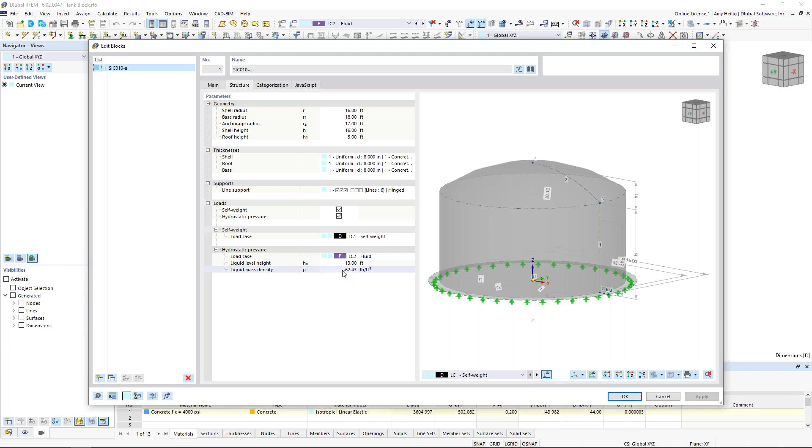We can even consider the hydrostatic pressure with an additional load case here. For example, you could input the mass density of the liquid, the height of the liquid inside the tank, and behind the scenes, we're running a JavaScript in order to update this block. So once you hit OK, it's inserted into RFEM directly.

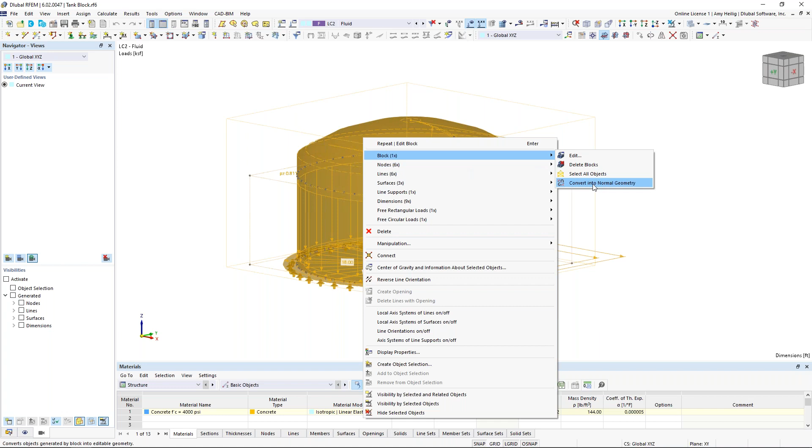If we wanted to make any changes, we could always right-click here to edit the block, or if we wanted to go ahead and convert it into normal geometry, we could do so to make additional changes to standard surfaces, nodes, and lines. If we turn this into wireframe view, it might be nice to see that additional fluid load inside the tank structure that was automatically added based on the density and height. So this is certainly something to take advantage of, if your basic geometry fits into one of these block options. Now for today, I will be showing the tank modeling from scratch.

We'll go ahead and open up a new model here. When we first launch the program, we would want to give it a model name. The type of model is set to 3D. Under the add-ons, these are the optional add-ons because RFEM 6 is responsible for the full analysis. But when it comes to design or some advanced analysis features, that's where we would want to activate the add-on. So in particular, today we're going to take advantage of the concrete design.

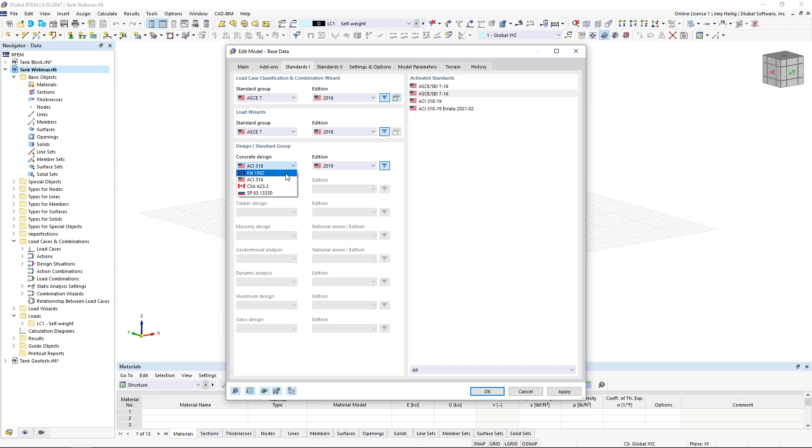So you'll notice on this third tab here, we'll now carry out the concrete design of our surfaces today according to the ACI 318 2019. But we also have the additional standards such as the CSA, the Eurocode, and any other international standards available under that concrete design add-on. We can generate our load combinations automatically according to the ASCE 7 or any other international code that you see here. We have added the 2016 version, so we will go ahead and generate our load combinations according to this standard.

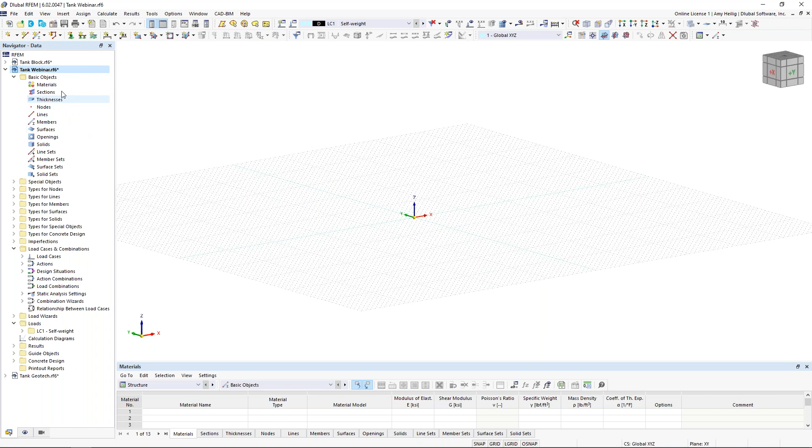So once we have input all of this information into our base data, we're brought here into our main program, RFEM. We'll begin today by drawing a new line element. I can do so within my toolbar. The line type is going to be of the type circle.

With this, I can snap to the origin point here, and then my second click can either be directly on my drawing grid to define my radius, or I can type in the radius into this dialog box that you see here and hit enter on my keyboard. So once we are done drawing this circular line element, I'm going to right click to divide the line by one intermediate node. I click OK, and so now you can see here I have two separate semicircles.

I'll select both of these line elements, and I'm going to right click here. And we have the option under lines to extrude this line into a 2D surface. So this is just a time-saving step rather than having to manually create this surface. We can actually extrude it directly from the line element.

We do want to generate a new thickness for our surface walls. So we'll define here our first thickness type of 10 inches, and we do need to also define a new material. So we access our material library, and over on the left, we'll use our filters to the United States, concrete, and we can select the ACI 318-2019. I want to utilize 5,000 PSI concrete directly from the library.

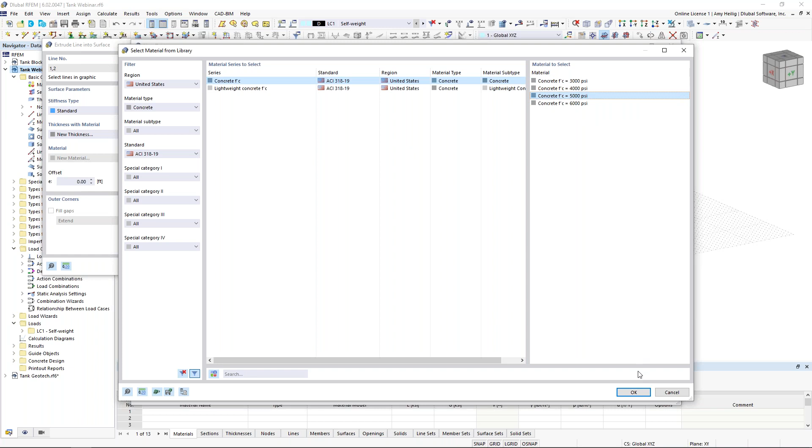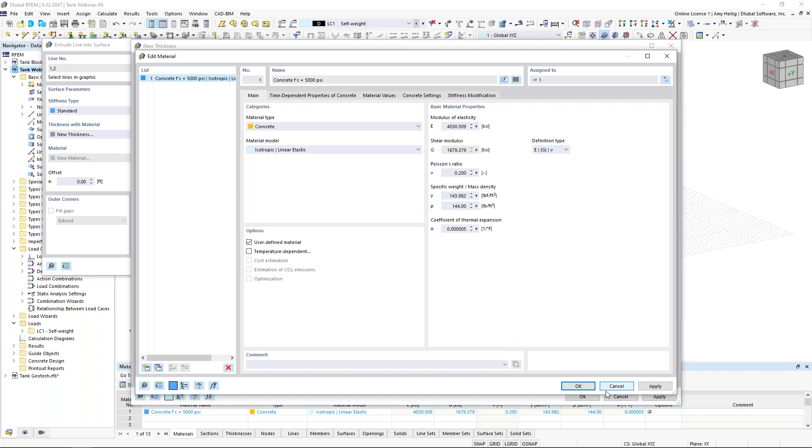Now, if we are utilizing a material for our project that isn't directly available in the library, we could certainly set one of these available materials, come back in to edit it. Then we can click on user-defined material here. And you'll notice that the material values can be adjusted, including the concrete compressive strength, modulus of elasticity, or anything else that you see here. You also can give it a custom name. For today, we'll go ahead and utilize the 5,000 PSI concrete, 10 inches thick as mentioned, and I click OK.

We now need to define the height of our tank wall. So I can directly input 17 feet in the positive Z direction. I click apply, and you can see here that our surfaces are automatically generated. If I take a look at both of these surfaces by highlighting and double clicking, we can see that information available to us in the Edit Surfaces dialog box, 10 inches thick, 5,000 PSI concrete.

Now the design properties is automatically turned off. When this option is turned off, we are purely going to do an analysis of these surfaces only. So nothing to do with reinforcement or the ACI, but when we turn on this checkbox, we will refer to that concrete design add-on to carry out the design according to the ACI standard. We'll get into this a little bit later on, so we'll leave those design properties off for right now.

We then want to go ahead and draw the surfaces for our roof. So I will define here a new node, and I'll directly type in my node coordinates as 0, 0, 21. I hit apply. I can right click to exit, and we see that node generated at the top of what will be our roof surface.

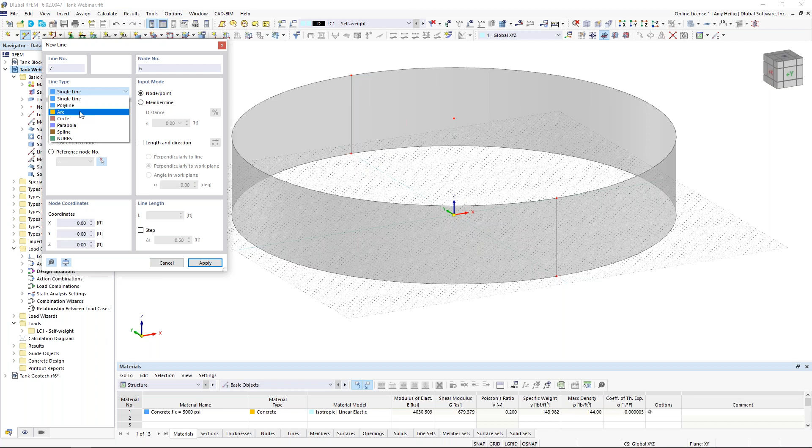I create a new line element. This time the line type is going to be arc, and then I can simply select all 3 points here to generate that line. I do want to break apart this line at this intersecting node so that it's two separate lines, and I can do so with this tool up here to connect the selected lines and then just highlight over this location here. So notice these are now two separate lines. I'm doing this because the program likes this a little bit better when it comes to the FE mesh generation that we'll see in a few minutes.

So now that I have generated these boundary lines, I need to create my surfaces at my roof. Well, we do have the surfaces available here in our dropdown.

The problem with these is that the surface must be in a single plane, and we have essentially a curved surface for our roof. So instead, we want to use the option right next to it, utilizing this dropdown to select a quadrangle. A quadrangle surface, as you can see, can have curvature. It doesn't necessarily have to be in a single plane.

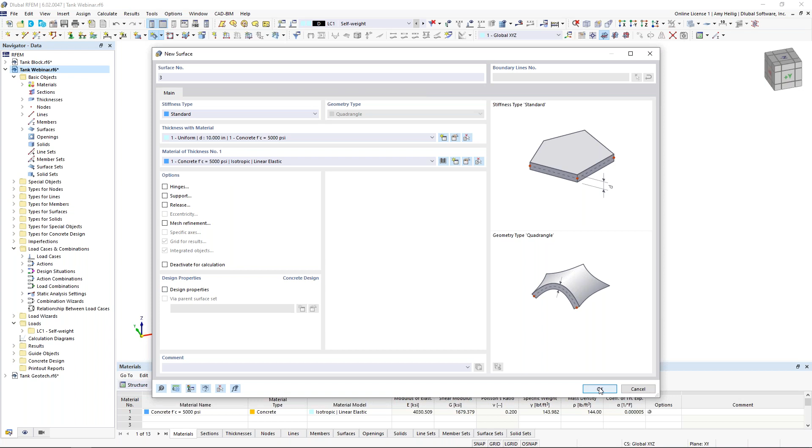We'll utilize the same thickness, the same material already defined for our tank walls, and we can turn off the design properties if we'd like. I click OK, and then I'm just simply going to select the boundary lines here of my surfaces at the roof elevation.

And now we have those surfaces drawn here. The final surface modeling is, of course, for our foundation. So we will actually utilize one of these surfaces here in a single plane, selecting the type circle.

For my foundation, I want to increase the thickness. So instead of utilizing the existing 10 inches thickness, I'm going to create a new definition type here, and we'll set this to 12 inches, utilizing the same 5,000 PSI concrete. I click OK. I'll turn off the design properties again.

I click OK. And for this, I'm going to snap here at the origin of my drawing grid. Then I can either snap directly on my drawing grid, or I can input the radius by typing it on my keyboard. For this, I'll set the radius by snapping to my drawing grid at 48 feet.

Now I'm going to take this one step further to actually add an opening at that surface that I just created. I want to create that opening utilizing the boundary lines at the bottom of my tank wall. So I select a new opening option, and I'll choose the type graphically. This allows me easily just to snap to the lines here of my bottom of my tank wall. That opening is generated. So now what we're left with here is a single surface on the exterior.

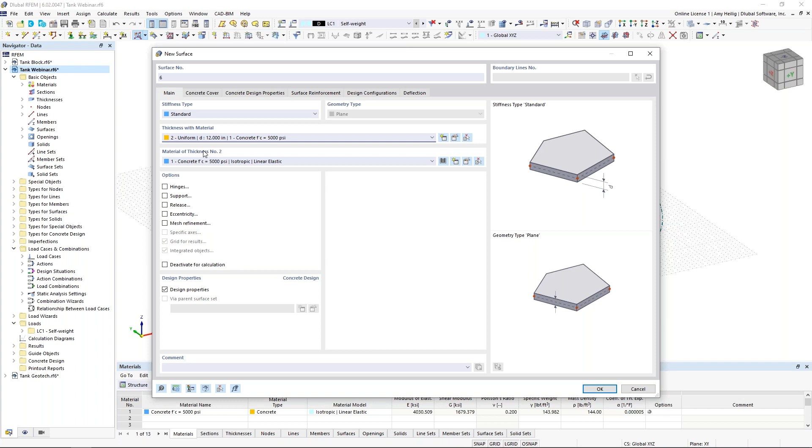Well, I want to fill in the opening now with an additional surface. So I'll go back up here to draw a new surface by selecting the boundary lines. Now I want to utilize the 12-inch thickness, the 5,000 PSI concrete, and I'll click OK. Now I can fill in that opening with an additional surface.

So you might be wondering, why did I create two separate surfaces here, one for the interior of the tank and one for the exterior? When it comes to loading a little bit later on, this will be much easier just to have a single surface on the interior at the base of the structure.

Okay, so now that we are done with our surface modeling, let us talk about support conditions. We can apply here a new surface support, and we do so within our toolbar up at the top, creating a new support definition type. For this one, we want to apply our soil stiffness in the vertical Z direction of our surface.

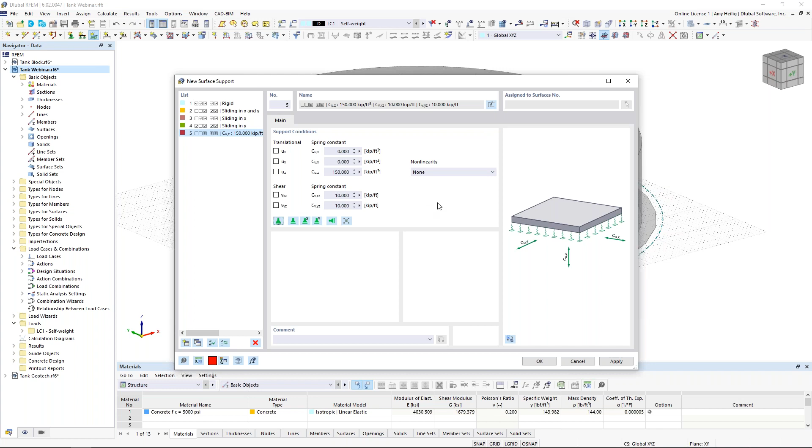So I can directly type in here the information that perhaps I received from the geotech engineer. For today's example, 150 kips per cubic foot. Now the spring constant in the shear directions of my soil, again, probably given to us from our geotech engineer, some smaller values such as 10 kips per foot. Once I have the definition type here of my soil, I'll click OK.

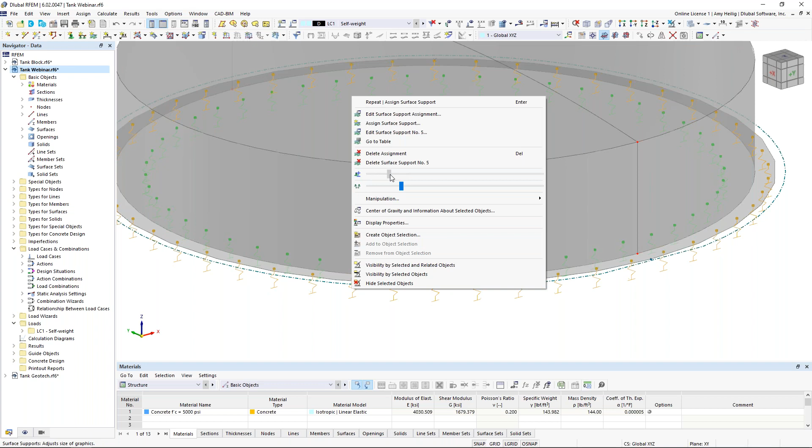I click OK once again, and then I can select these surfaces at my foundation level. I'll right click to exit. Let me turn off my drawing grid. Notice that with these surface supports, we can always right click and use our slider here to increase the size of these in case they're too big or too small. That's a nice feature we've recently added as well.

Now, as far as the translation directions, I want to apply a new line support. With this line support, I'm going to take advantage of this already predefined definition of a hinged application. So essentially, we're just going to restrain translation in the global X, Y, and Z directions. Perhaps we have some type of stem wall at the exterior here that's preventing any translation in the X or Y directions, as well as maybe in the vertical direction.

Now, of course, the support conditions will vary depending on your structure, but that's just a short introduction of how to apply those for our example today. Let us talk about the local axes. This is a very important topic when it comes to surfaces.

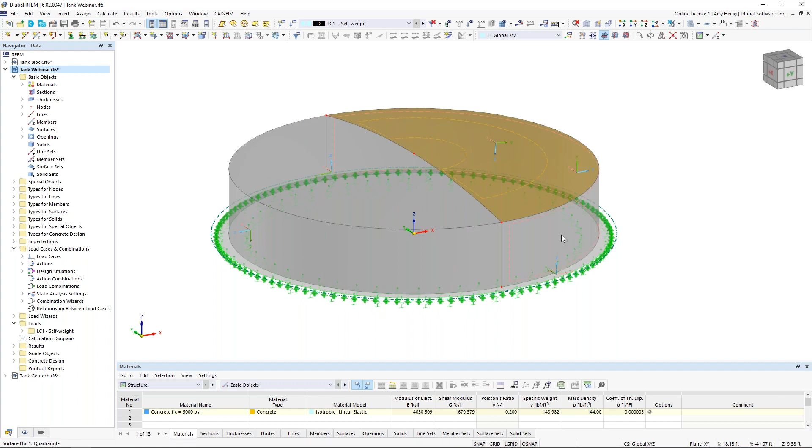So with these surfaces, I can right click here to turn on the local axis system. And maybe I'll turn this to wireframe view so it's a little bit more clear to see. Now notice that for my two roof surfaces, the Z axis is facing up on the left, but it's facing down on the right-hand side.

So why is it important to consider the local axis orientation for adjacent surfaces like this? Well, for several reasons. The first is when we are applying the reinforcement for these surfaces, it does depend on the local X and Y directions. Number two is load application - we'll certainly be applying loads today that are normal to the face of the surface according to the local Z axes, so we want to ensure they're all facing the same orientation. And finally, our results. The results presented to us for these surfaces are also based on the local axes. So if we just have our axes facing every which way with no order to them, the input into the program as well as the result output is not going to be correct. Again, a very important topic.

Now, to address the Z-axis facing down over on the right-hand side, this is a very easy fix where we can just right-click on this right-hand surface and reverse the local axis system. And now you'll notice that both of those are facing upward. The Y-axis and X-axis are also oriented in the correct direction.

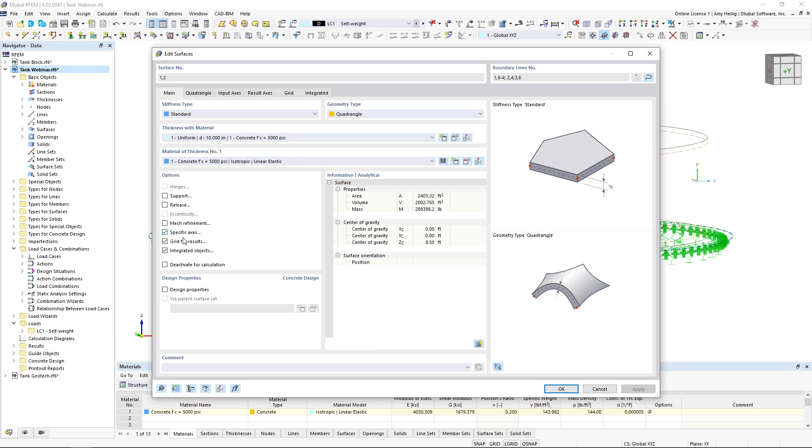If we take a look at our wall elements here, our wall on the left has the Y-axis facing down, but the Y-axis is facing up on the right. Now, to right-click and reverse the orientation won't work in this scenario. So what we need to do is to highlight both of those surfaces for our tank walls, double-click to edit, and activate here what we call the specific axes.

So we now have a new tab called Input Axes. Under this dropdown, we can choose the option Axes Parallel to Lines, where I can tell the program to set the local Y-axes of my surfaces parallel to a line that I select in the model. So we'll choose line number 6, for example. I click OK through these dialog boxes, and now you'll see the Y-axes are oriented in the upward direction for both surfaces. The Z-axes are pointed outwards, and the X-axes are in the horizontal direction. So everything looks good there.

So once we have ensured that we have oriented our local axes, we can go ahead and right-click to turn those off. The next thing to do is to talk about the FE mesh. I always think generating the FE mesh is a good tool to use while we're modeling to ensure that we don't have any modeling errors. So now that we're done with the drawing of the surfaces, the supports, the local axes, under Calculate Mesh Settings, the target FE mesh length is set to 1 foot by default.

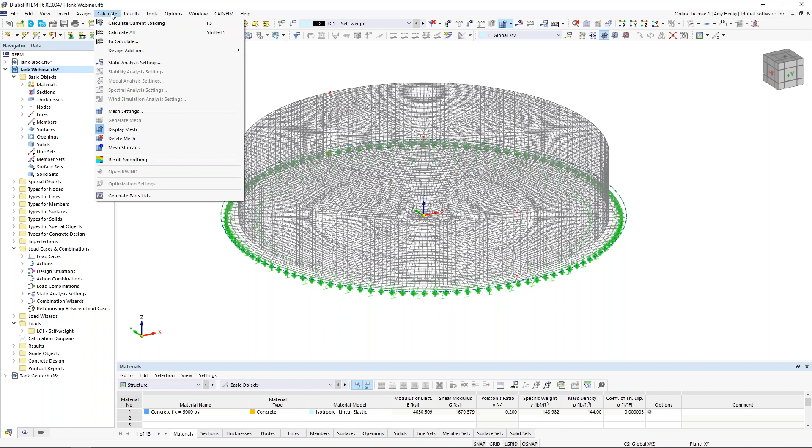So if I hit OK and apply, the program will go ahead and generate the mesh for us, and we can see the mesh looks quite good here for this structure. Now, for my example today, I want just a quicker calculation, so I'm actually going to set this to something a little bit more coarse, but certainly for your projects, 1 foot might be sufficient here.

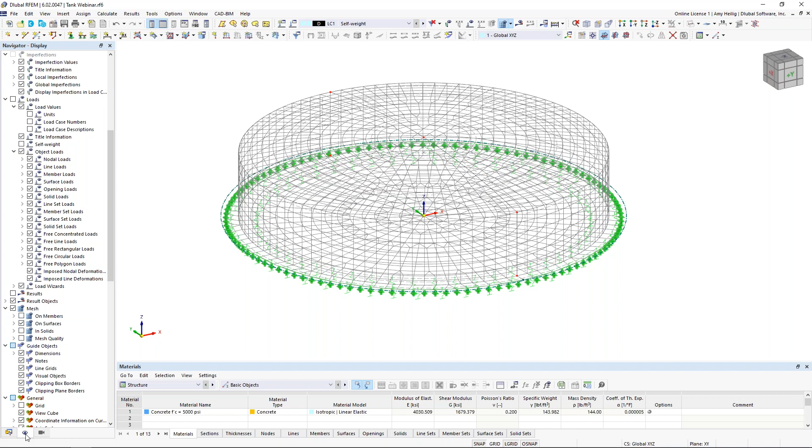For today, we'll go ahead and utilize a 3 foot FE mesh spacing, again just for a quicker calculation. I would probably recommend that even this is a little bit too coarse - we would want to go a little bit smaller. But moving forward with our example today, if we're not interested in viewing this graphically after we've generated the mesh, we can simply visit our navigator over on the left, the display tab, and here we can turn off the FE mesh graphically.

So let us talk about the reinforcement now. Each of these surfaces, if you remember, I'll highlight all of them - we had actually turned off the design properties. When I turn these options back on, notice the additional tabs that we get up at the top. I do want to preface that I already did a webinar related entirely to ACI concrete design for members and surfaces where I go much more into detail than what we have time for today. So certainly refer to that recorded webinar if you are interested to learn more about the concrete design add-on.

So today I'll just be giving you a brief overview.

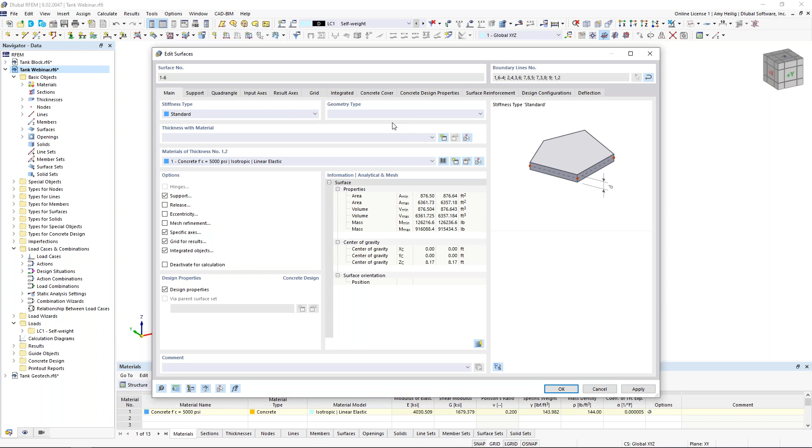So we'll visit the concrete cover here, and we can see the default is set to 1.5 inches at the top and bottom, or we can make modifications here.

The concrete design properties. This is where we tell the program in which orientation we want to set the first reinforcement direction. The default here is set to the local X axes. So again, the reinforcement is dependent on those local axes, hence why we want to ensure that adjacent surfaces are all oriented in the same direction.

We could also modify this to the local Y axes. We could also rotate it so it doesn't necessarily have to follow either of those axes. So quite a few options there.

Under the surface reinforcement, we do need to define a new definition type here. So we create a new surface reinforcement. The program immediately asks what type of material would we like to use for our reinforcement.

So we visit our material library. The program populates over on the left-hand side the United States reinforcing steel for the ACI, where we choose grade 60. I click OK.

Now the reinforcement type dropdown, we do have mesh. So we have some welded wire mesh options directly available. You can choose from our library, or the rebar option, where here we can select, let's say, number 7s at the default here, 6 inches on center spacing.

Now we can see our picture over here on the right update, so that we have our number 7s at 6 inches on center, again in the local X direction.

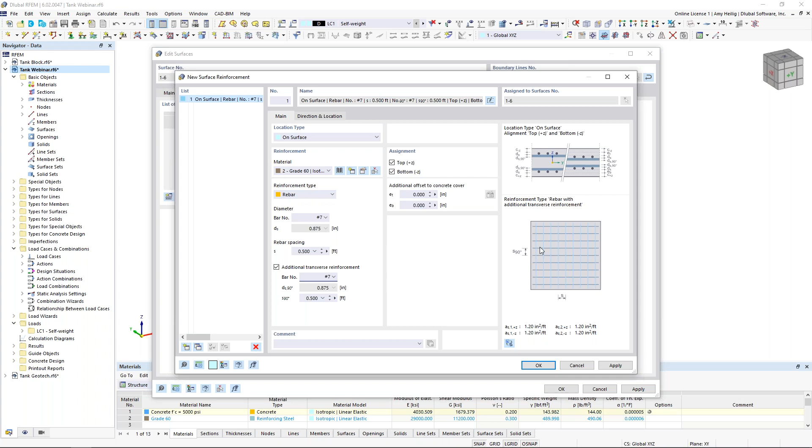If we wanted to apply transverse reinforcement, we can do so within this same dialog box by simply turning on this option here. We'll also choose number 7s, and we'll leave this at 6 inches on center. The picture updates on the right, so now we have that additional reinforcement in the local Y direction of the surface. This is applied at both the top and the bottom.

Now, I recognize for a standard project, we would probably have different reinforcement for the foundation versus the tank walls versus the roof surface. But for today, we're just using those number 7s at 6 inches on center for all surfaces, but you certainly can create additional reinforcement definitions here.

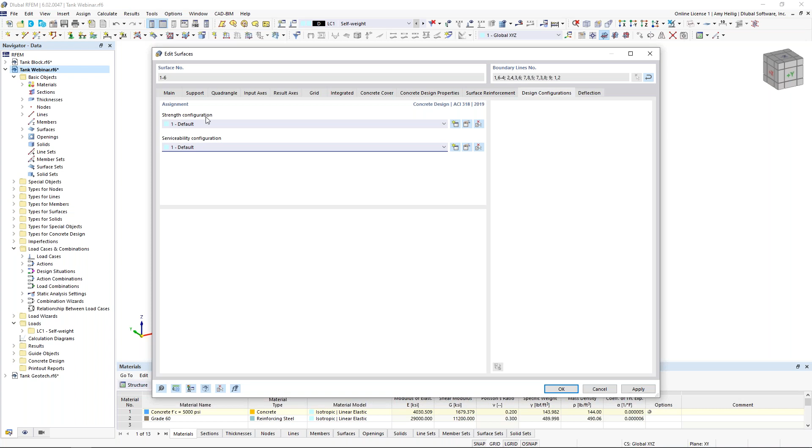Under the design configurations, we have a couple default options here. If we take a look at our strength configuration, this is just the information that is specific to the ACI 318 that goes into the calculation for the strength design.

Now, alternatively, we have the serviceability configuration. So if we take a look at here, what might be interesting for our project today is to talk about the crack analysis. So we certainly can take into consideration the crack width and the reinforcement spacing set forth by the ACI in chapter 24.3.2.

But we also can take a more analytical approach and actually calculate the true crack width with the Gergely-Lutz equation. Once we get this crack width, we can compare it then to the allowable crack width set forth by the ACI PRC 224. Within this drop-down box here, we have the limiting crack widths, and you can see it all depends on what our structure will be used for.

For today, if we want to utilize this tank to be used as a water retaining structure, perhaps we select the first option here. Now notice that my allowable crack width is something very small, at 0.004 inches.

We also have some additional settings here for deflection, including the limiting deflection ratio for surfaces that are supported on both sides or maybe more of a cantilever type surface. If we're not interested in deflection at all, we could certainly turn this off altogether.

So once we have made our serviceability configurations, we can click OK. Keep in mind that you can create different configurations for different surfaces in the model, but currently we're applying these same configurations to surfaces 1 through 6.

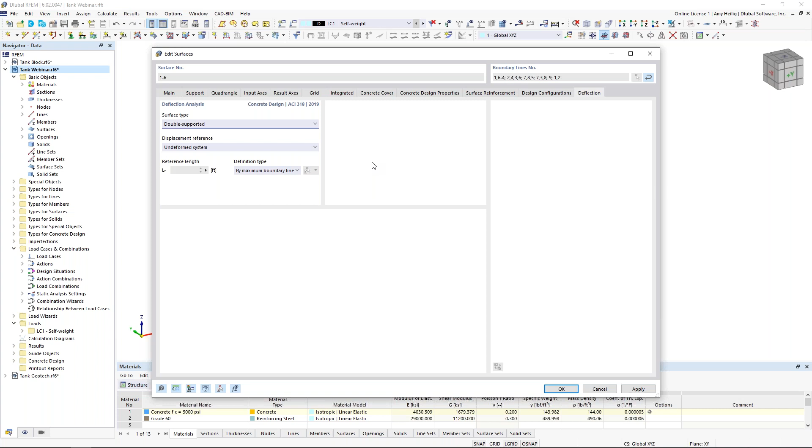Okay, so once these are defined, I click OK, and what you'll notice is that we actually give you a visual representation of those number 7s at 6 inches on center at both the top and the bottom of the surface.

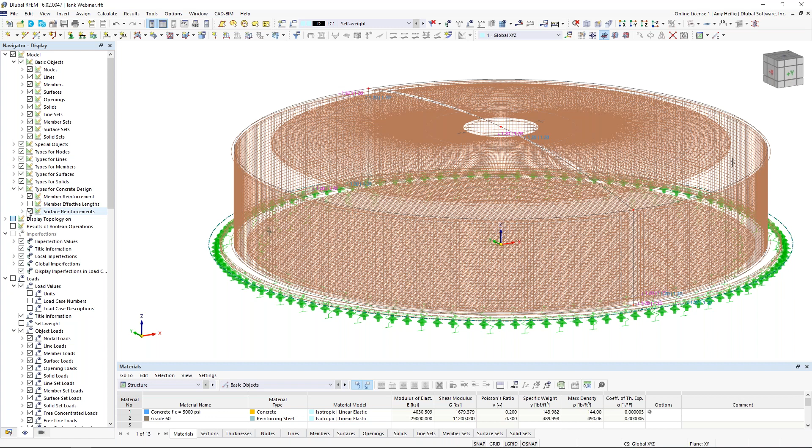So if this is a little bit too overwhelming graphically, we can once again visit our navigator and the display tab down at the bottom. If you scroll all the way up to the top, we have this option here under the model tree for types for concrete design, where we can turn off the display of the surface reinforcement.

So I would now say that the modeling procedure is complete. We would like to now move on to loading. We'll visit our load cases and combinations dialog box by accessing this button here in our toolbar.

The program automatically creates our first load case here, such as self-weight. I'm going to rename this one to dead load. Notice the self-weight is active here. We'll select the action category dead, and this is all based on the ASCE 7.

If we take a look back at our base tab here, remember we told the program to generate our load combinations automatically according to the ASCE 7 2022, but we could certainly make changes to that standard here within the dialog box. The program will automatically create the load combinations with this option checked on according to the combination wizard. So assuming for our dead load, we really don't want to add any additional loads beyond self-weight.

We'll go ahead and create our second load case. This load case is going to be called fluid, with the action category set to F, again directly from the ASCE 7. When I click OK, I'm currently looking at this load case here at my structure, and now we need to actually apply the load to the tank itself.

With this fluid load, we want to assume that the tank will be holding this fluid at a height of 15 feet. Remember, our tank wall height is 17 feet. So in order to apply this outward pressure of the tank fluid inside, we want to apply what we call a new free rectangular load.

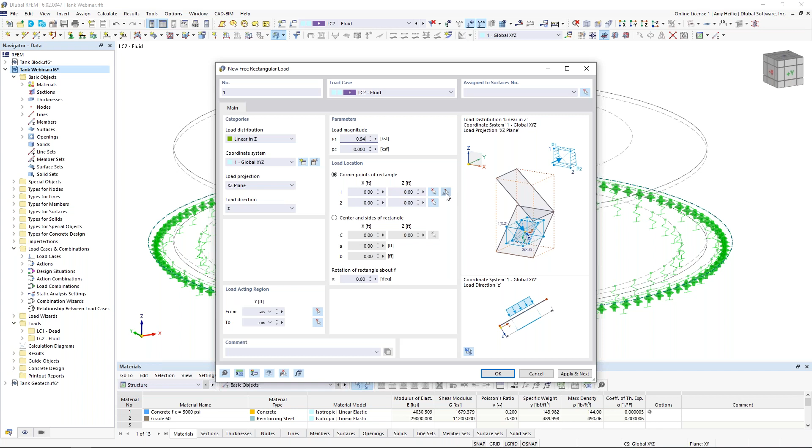The next thing to do is to define the load location, or to confine this load within our structure. The best approach for this is to apply these corner points of the rectangle by selecting the option graphically.

For this, I'm going to turn back on my grid. I'm going to move my grid origin right up here to the front face of my structure. If we zoom out and take a look, notice my drawing grid is right at that front face in the XZ plane.

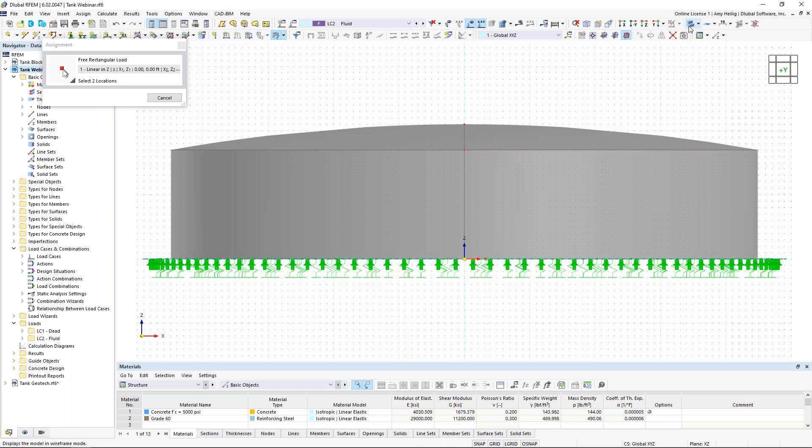Taking a look at my view in the reverse Y direction, this allows me to snap from the bottom left corner of my tank wall to the upper right corner at a height of 15 feet. Once I click that second point, you can see that the coordinate points are populated here automatically.

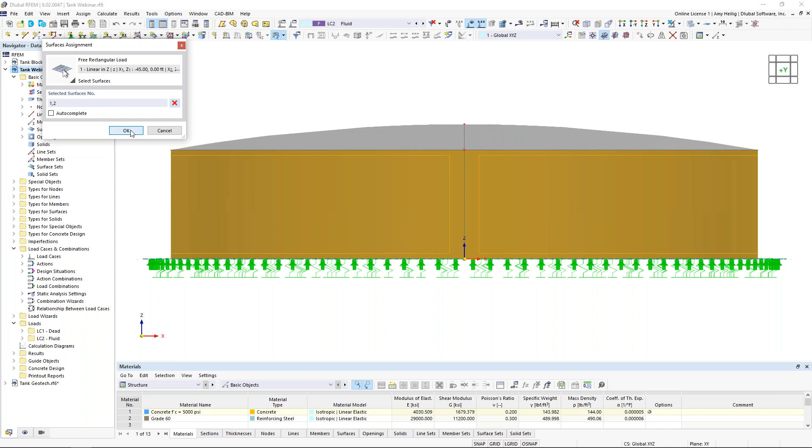I want to assign directly to surfaces 1 and 2 by highlighting them here. I click OK, I click OK, and now if we zoom out and maybe turn this to wireframe view, we can see that pressure being applied to the interior of the tank walls pushing out, but only to a height of 15 feet, not the full 17 feet. We can also right click here to decrease the size of this load as well graphically.

We also want to apply a downward load at the foundation of the structure to account for the weight of that liquid. For this, we can apply a new surface load, and a surface load will be a much easier application here, where the load type is set to force in the global Z direction with a magnitude of negative 0.94 kips per square foot.

And then I can graphically select that surface. If you remember, I created that separate surface at the interior of the tank for loading purposes, such as this one. I can right click here to decrease the size of that load as well. So now our fluid load is complete. We'll move on to our next load case.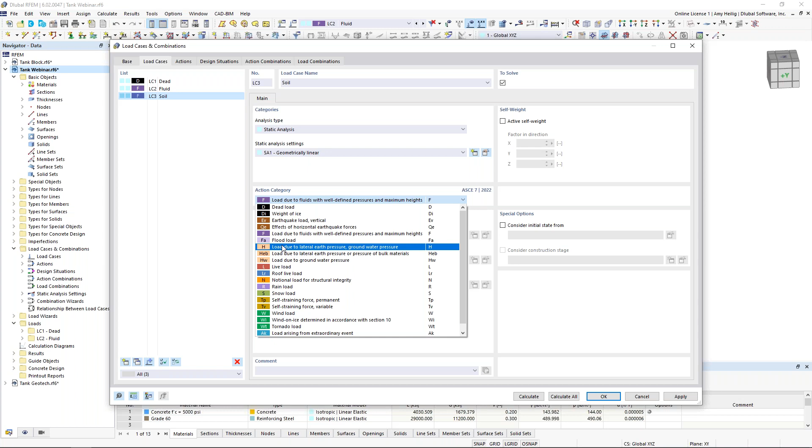For this, I'm actually going to make a copy of the existing fluid load case. When I make a copy, I can rename this one to soil, and I'm going to change the action category to H for lateral earth pressure. I click OK, and now we can see our new load case here. Now the advantage of copying the existing load case is that you'll notice my load was also copied into this new load case for soil.

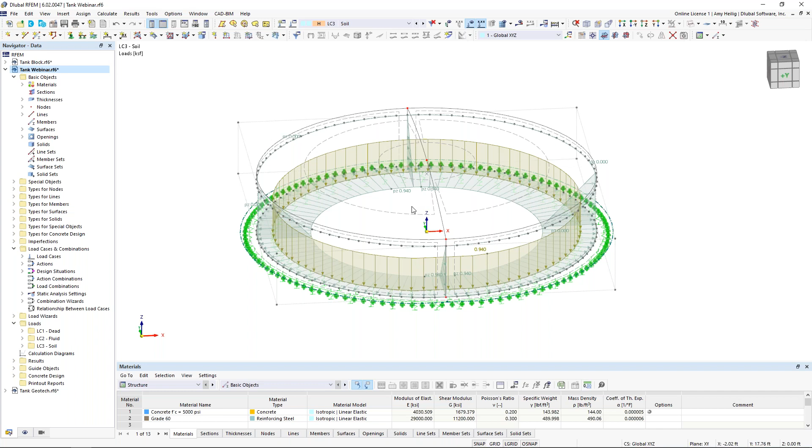So we want to assume that this structure is partially buried up to a height of about 11 feet. Initially we want to delete this downward load that represented our fluid, and we want to modify the interior pressure here. For soil, we actually reverse this so that the soil is acting towards the walls rather than away from it on the exterior.

I can simply double click and directly modify my load magnitude to negative 0.4 kips per square foot at the base of my structure, and then we will linearly interpolate that to 0 kips per square foot at the top. Now, instead of a height of 15 feet, I want this to be set to 11 feet, so I can just type in 11 feet directly in my coordinate points here, still being applied to surfaces 1 and 2. I click OK and notice that pressure is now acting at the exterior of the tank walls, pushing in. This is just a time-saving tip if you want to make copies of existing load cases.

The next load case is going to be snow. So I'll create a new load case here, type in the load case name snow, and set the action category to snow load. Once I've defined that, we'll take a look at our empty load case here. For the snow load, this will be an easier application as well with a general surface load.

We're going to apply this to the roof surfaces, and instead of just a general uniform snow load, perhaps we'd like to have an unbalanced snow load. Well, that's quite easy to do. Number one, to set the load direction in the projected Z orientation. Projected is quite common for something like snow loads where we can account for the angle of the surface and adjust the load magnitude accordingly.

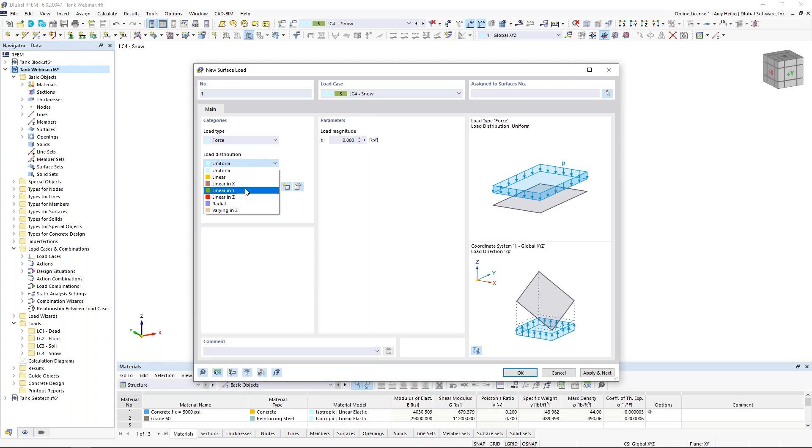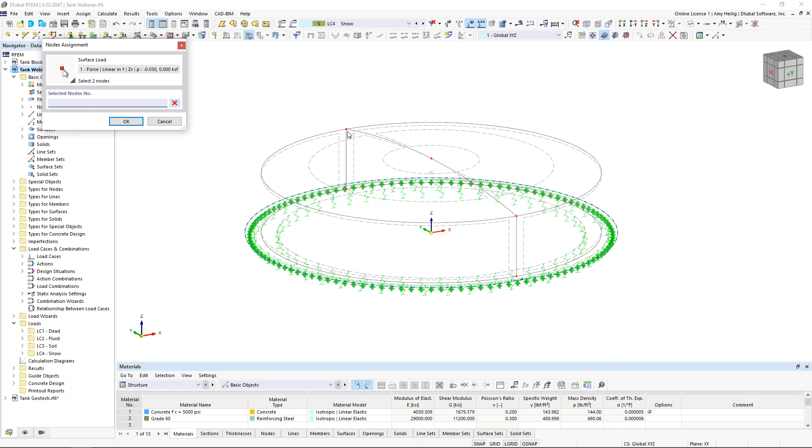The load distribution here will actually be linear in the Y direction. At the left side of my structure, I want to have a magnitude for my snow load of 30 pounds per square foot, but on the right-hand side of the structure, I want this to be 0 kips per square foot. Now I just need to tell the program where to vary this load at that roof, so I can select 2 points, one on the left and one on the right-hand side. I want to apply to my roof surfaces, so I can either type those in or graphically select surfaces 3 and 4. I click OK, and now we see a nice unbalanced projected snow load here at the top of our structure.

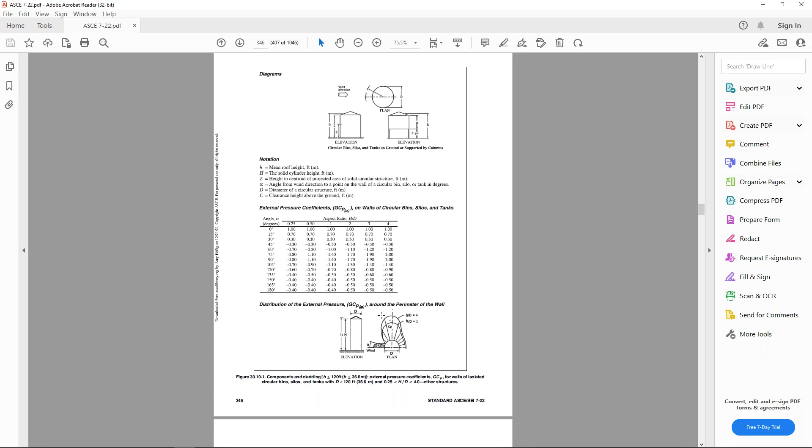The final load case is going to be wind. So we'll create a new load case here with the name wind and the action category set to wind load. This one can be quite an interesting one for these types of structures. I'd like to refer directly to ASCE 7-22, in particular figure 30.10-1 that we're currently viewing here. This gives us the external pressure coefficients based on the components and cladding procedure for tank walls.

If I zoom in here a bit further, we can see based on this table the varying degrees in 15-degree increments, what the external pressure coefficients will be, and essentially a figure showing us how that wind load will vary as we move around the circumference of our structure. So this is certainly a very complex wind loading. This isn't a uniform load, it's not being linearly distributed. So how can we account for something like this within RFEM?

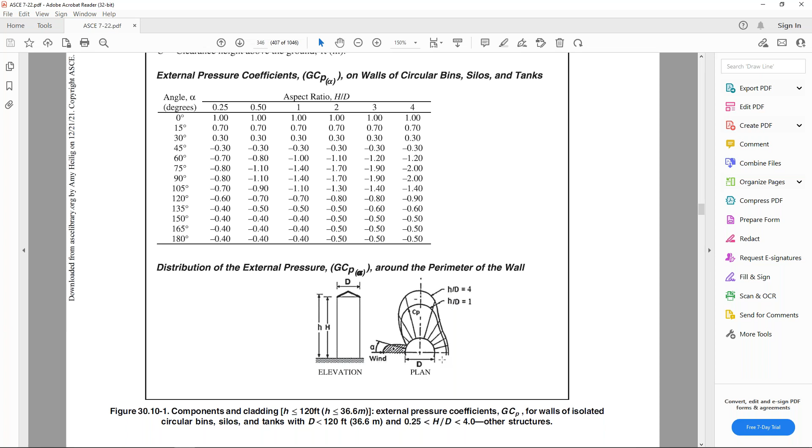Well, we'll go back to the program here, and once again, we want to take advantage of this new free rectangular load. But the difference here is that the load distribution will be of the type varying along perimeter. So then we have the ability here to move around the circumference of the structure, and we can vary that load similar to what we just saw within the standard.

The load projection is going to be according to the XY plane. So we currently have that set, that plan view based on these global X and Y axes. The load direction is once again going to be based on the local Z axes for our tank wall for this wind load pressure. Now we need to give it a starting load magnitude, so we'll begin with negative 0.02 kips per square foot.

But on the next tab, this is where we can define the varying angles and the varying factors that will be multiplied by that starting load in order to get the true load or pressure that we'll be applying to the structure. The first thing to do here is to define the axis coordinate at the center of our structure, and this is just any type of vector, so we can define this with pretty arbitrary points. For example, the vector right through the center of our structure could be set for the first point at 0,0,0, and the second point could be 0,0,10 or 0,0,2. It doesn't matter. Once we have this information, we need to fill out our table.

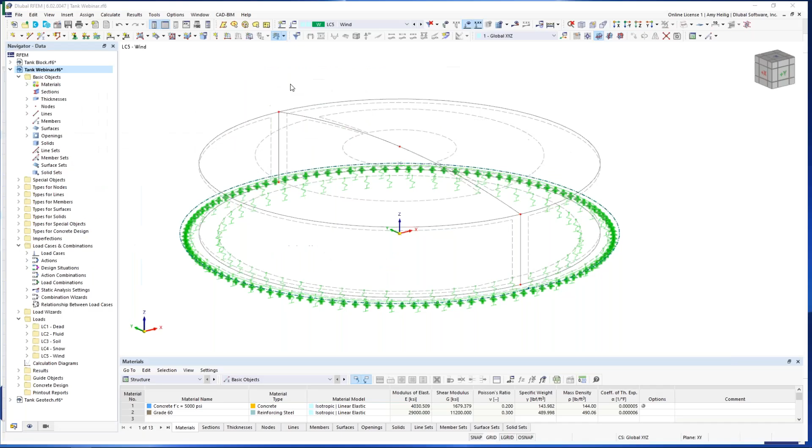So once I have these two columns filled out, we can go back to the program, and instead of exporting the table, we now have the option to import. So I click this button, and the program will essentially take this table that's already open and bring it directly into the program. And the load here in the third column is automatically calculated, so now we can see how this load is going to vary around the circumference of this circular structure.

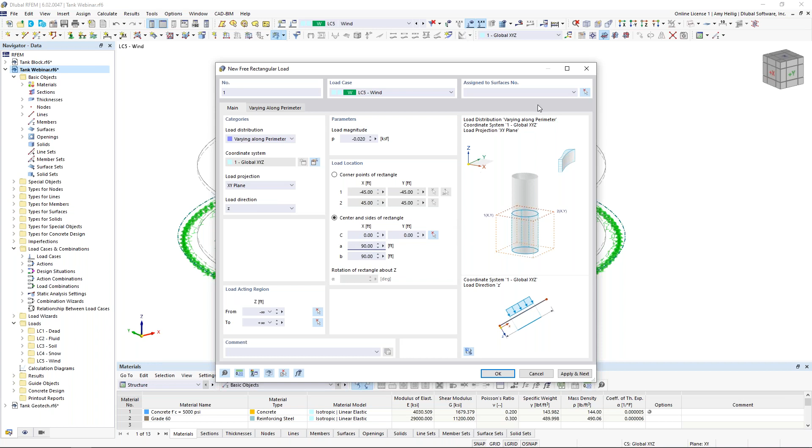So back under the main tab, remember we need to confine this load to a certain area. I think the easiest way to do it here is to define the center of my rectangle at the points 0,0. Then the dimensions of this rectangle are going to be set at 90 feet in one direction and 90 feet in the other direction. This is nothing more than the diameter of my tank in both directions. I then want to assign it to my wall surfaces, so I could either directly type in surfaces 1 and 2, or graphically select them here. When I click OK, what we should see is that wall pressure for the wind load now applied normal to the surface.

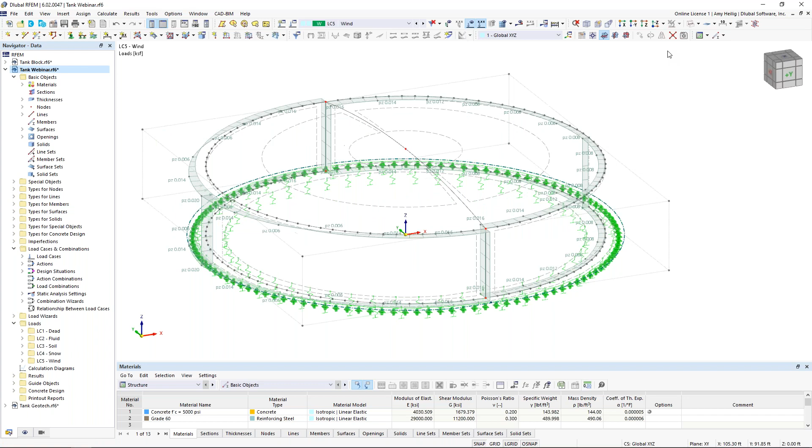And if we take a look at the plan view here in the reverse Z direction, and maybe we increase the size of this load quite a bit here, we can see again how this load is varying, referring back to the ASCE7 as we move around the structure.

Now, everything that I have done so far with the load application has been through the dialog boxes or graphically, but keep in mind the tables are also a great way to work. So within this drop-down box in our table, we have our load input. If I access loads, and I'm currently looking at the free rectangular load table, we can see the load that I've already defined under the wind load case.

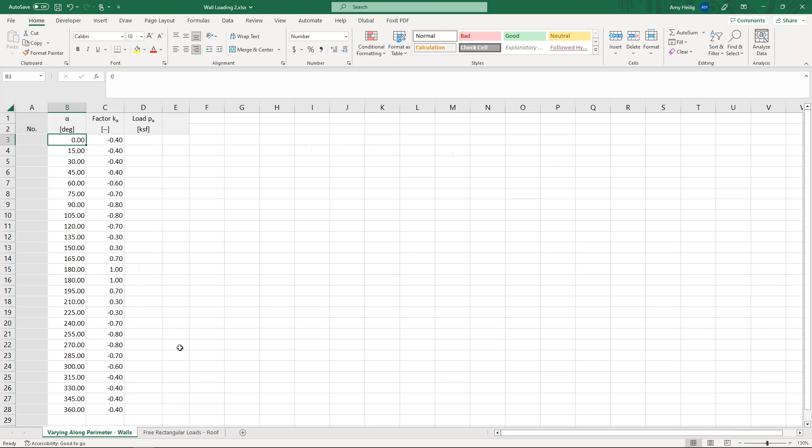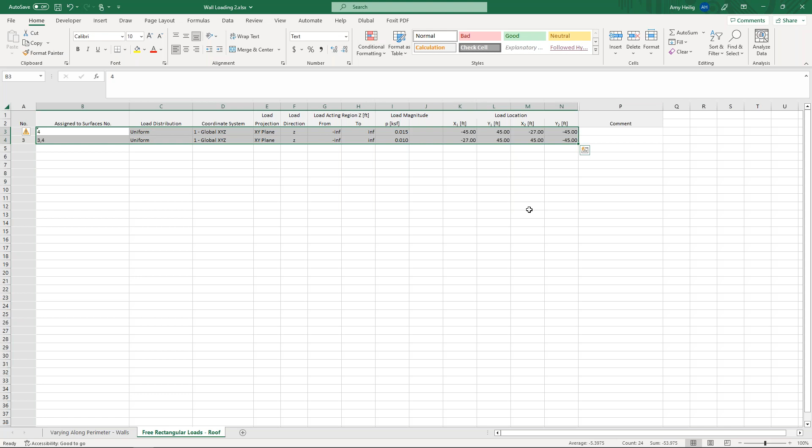But I'm going to go back to my Microsoft Excel sheet here, and I've already applied the same rectangular free loads for my roof as well, but I put it into Microsoft Excel format here where I can just simply hit Control C. I can go back to the table here and hit Control V. So now you'll notice that we have a couple additional loads for our roof, again referring directly to the ASCE7 where we need to have a slightly higher magnitude for a certain distance at the windward face here.

And then for the rest of the structure, we have a smaller uplift magnitude. Again, this was just defined as free rectangular loads that I copied and pasted in from Microsoft Excel. So now our loading is also complete.

We want to go back to our load cases and combinations to discuss the cracking of the structure, specifically according to the ACI standard. Currently the full stiffness of these surfaces is going to be used for the calculation of the analysis and the design. But we know if we refer to the ACI that there are specific factors that we should apply to the stiffness to account for cracking.

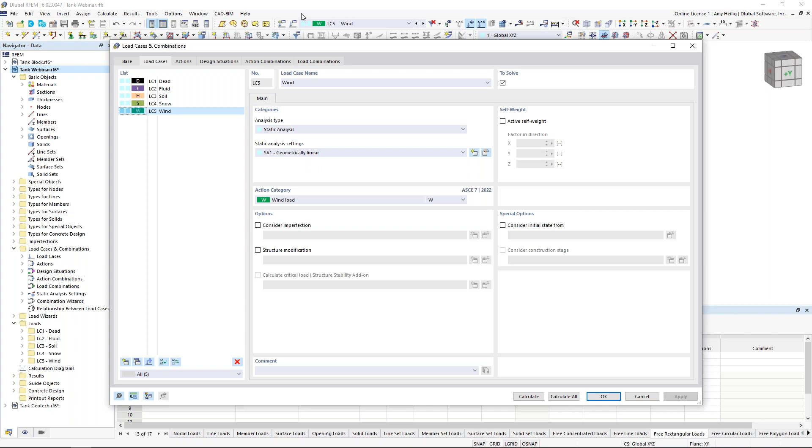We do this by turning on a new structure modification under the load case. So I create a new structure modification definition according to surfaces, and now we get a new tab here where I can use my drop-down box to create a new stiffness modification definition. This gives you the ability to modify the stiffness directly for the stiffness matrix entries of this surface.

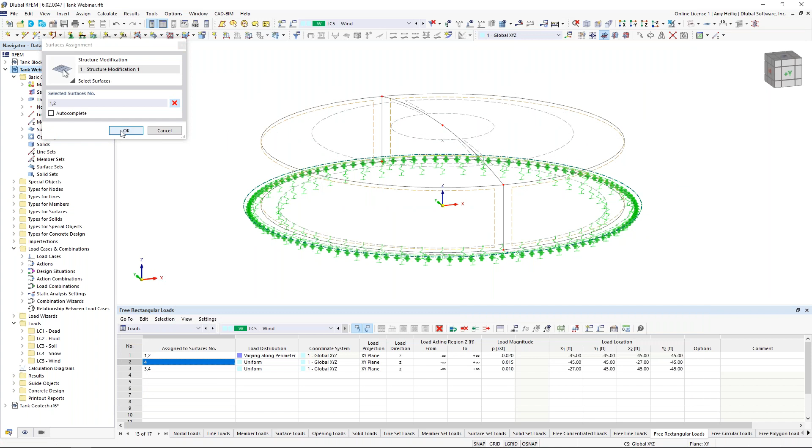Or you can refer here directly to the ACI standard, or the same concept for the CSA standard. When we select this option, we already have those factors directly imported into the program based on this table shown here. So for example, assuming that our walls are uncracked, we'll apply a factor of 0.7 to the bending and torsional stiffness of our wall surfaces. I just need to tell the program which surfaces to apply the stiffness modification to, selecting graphically. So we'll apply that to surfaces 1 and 2.

Now we also have an additional definition here, according to the ACI, for flat plates and flat slabs. Perhaps we want to apply this 0.25 factor for bending and torsional stiffness to the remaining surfaces. I can graphically select the top surfaces using my selection box, and the bottom surfaces for my foundation, and click OK.

Now, if yours don't fit directly into that ACI table, you can always manually modify any of the stiffnesses for that surface. So now that we've applied it to the wind load, we would hold down our shift key to apply this structure modification that we've already defined to the other load cases as well.

Now, because we are generating the load combinations automatically according to the ASCE 7, we will see here 2 design situations generated. We have our first design situation for LRFD, or our factored load combinations, and our second design situation for ASD, or unfactored load combinations. These design situations are absolutely necessary to carry out the concrete design according to the ACI, which is why these options are checked here.

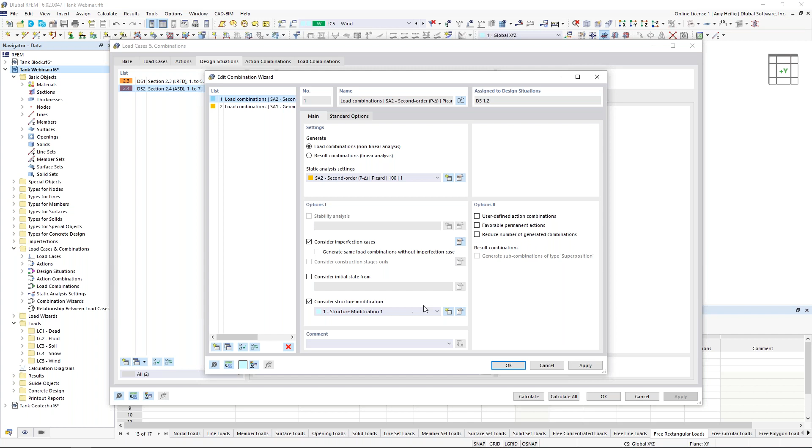If we take a look at the combination wizard settings, we can also turn on this structure modification that we just defined for those cracking factors here under the design situation directly. Once I do that, if we take a look at our load combinations tab to view the individual load combinations listed out, notice that this structure modification was already added here. By all means, we could manually apply them to each individual load combination as well, but this is just a quick time-saving tip.

So all of these factored load combinations in orange belong to this single design situation that I just showed on the previous tab. And then we have all of our unfactored load combinations belonging to our second design situation.

So now that we have defined our load cases and combinations, and set up that stiffness modification, we're almost ready to run the calculation. What I want to do though is take a look at the concrete design add-on, and we can drill into this by utilizing our table drop down at the bottom. Under the first tab, you'll see again those 2 design situations, and we have the factored load combination, which is set to the strength design according to ACI.

The unfactored design situation is set to serviceability. Under the objects to design, we do want to design all surfaces, surface 1 through 6. We're not interested in punching shear, so we can go ahead and uncheck that—not applicable for our model today.

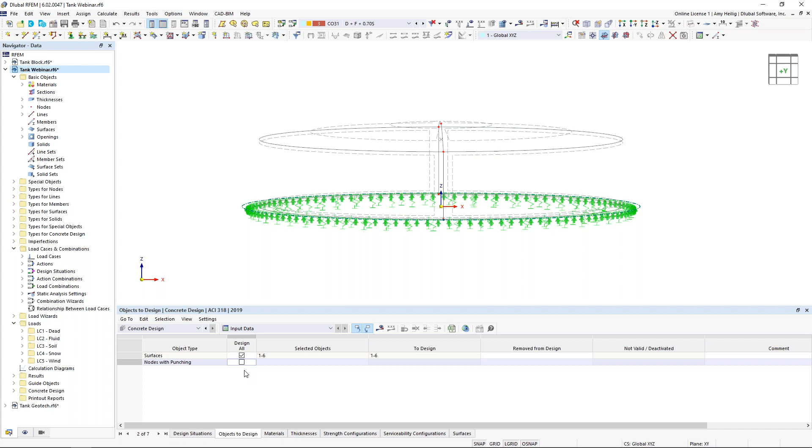So now we can go to calculate all. What the program will do is generate that mesh if we haven't done so, and we're going to run the calculation here for all of our load cases, as well as all of these load combinations.

Within RFEM 6, we take advantage of the multi-core processor within your computer to solve multiple load combinations at once, whereas previously in RFEM 5 we were solving them one by one. So that solves fairly quickly.

Now that the analysis is done, we're going to do the concrete design also within this calculation. You'll notice the program needs to solve again for all of the unfactored load combinations. We might wonder why, in comparison to the standard static analysis. Well, if we refer to the ACI, we need to calculate the effective moment of inertia again for topics like deflection for each one of these surfaces.

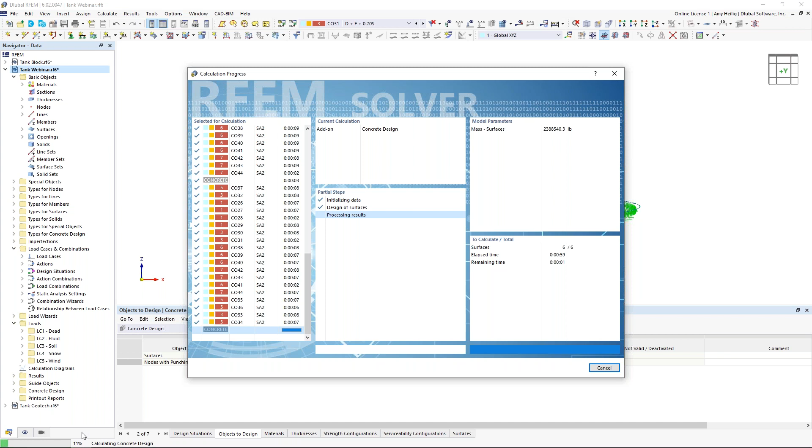We can always check the progress bar in the lower left-hand corner of our screen. This shows us the progress of where we're at with that calculation before the results are presented. Now that that's done, we have a new tab available in our navigator for our results.

We can currently select any one of these load combinations here. We're looking at the static analysis global deformation, so I can scroll through these different load combinations just to see how my structure is changing.

What else might be interesting is to back this up a step and take a look at the calculation for one of these single load cases, for example fluid. If you remember, the fluid load case looks something like this, where we had that pressure acting at a height of 15 feet from the interior of the structure.

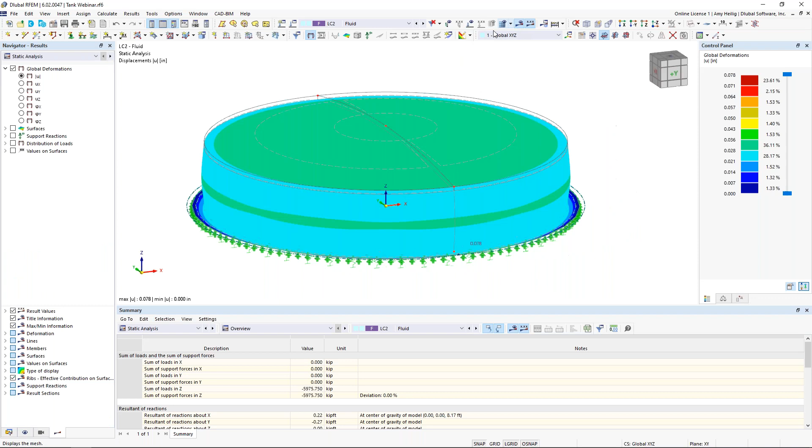Once we have solved this load case, we have an additional feature called distribution of loads. We can view the loads from this load case based on the local z-axis, just to ensure the loads were properly applied to the surfaces. Sure enough, we can see the magnitude increase as we move down to the base of the structure, due to the increase of density and height of that liquid inside our tank.

Exact same concept for our soil, but this time it should be a height of 11 feet, and we can see that varying load magnitude.

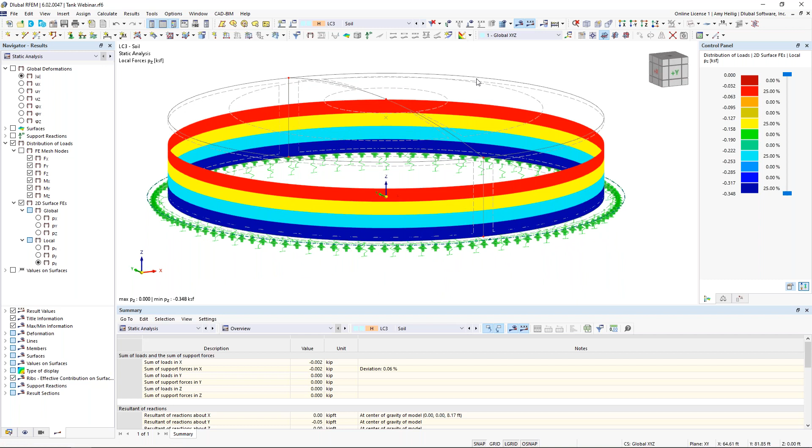We can even check this for our wind load. For the wind load, we'd want to modify this to the global x-axis for our distribution of loads. We can see the wind flow is moving from left to right based on the global x-axis, and we'd see an increase in magnitude at the front. But as we move around the structure, we can actually see how those loads were distributed to the tank walls.

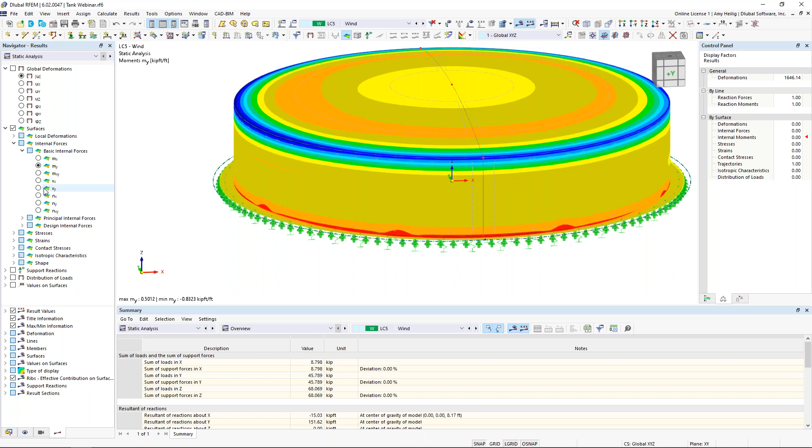What if we're interested in the design of these surfaces, but not necessarily within RFEM, and we'd like to take a look at the internal forces shown graphically, and take this information such as our bending moments, shear information, normal forces, whatever it may be, and export this to Microsoft Excel? Well, we can do so.

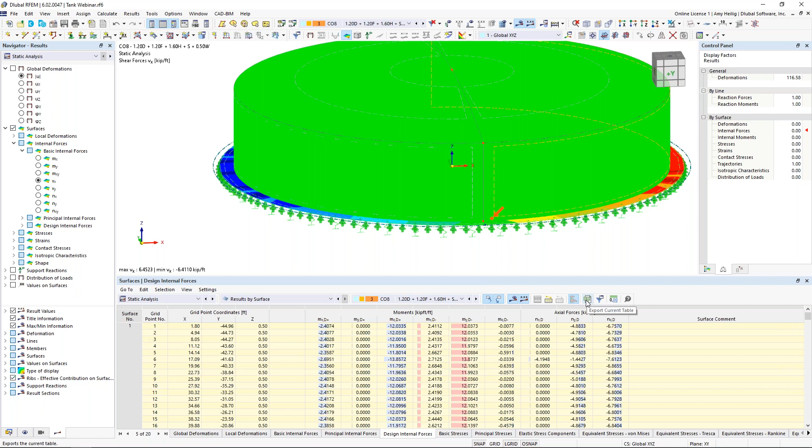Everything is shown to us graphically here, but we also can see the static analysis in our drop-down option, results by surface. Within the table format, we can see the design internal forces. We can switch to a different load case here, and export this information to Microsoft Excel, and this is how we could do our own design with our in-house tools or spreadsheets, or whatever it may be.

If we wanted to make a slice through one of these surfaces to view a results section, we can access that tool in our toolbar - set new results section. This will allow us to make a section cut through one of the surfaces, and we can either define it using 2 points and a vector, or an already existing line within the model. Utilizing this option line, I can graphically select these 2 line elements that I generated at the beginning of the example for my roof surfaces, lines number 7 and 8.

When I click OK, I'll go ahead and turn off my ISO bands here, and go back to maybe MY. We can now see that section cut made right through the roof of those surfaces, also following that curvature. We can increase the diagram on the right-hand side, switch load combinations at the top, and switch to different internal forces, such as shear in the X direction, shear in the Y direction, whatever it may be.

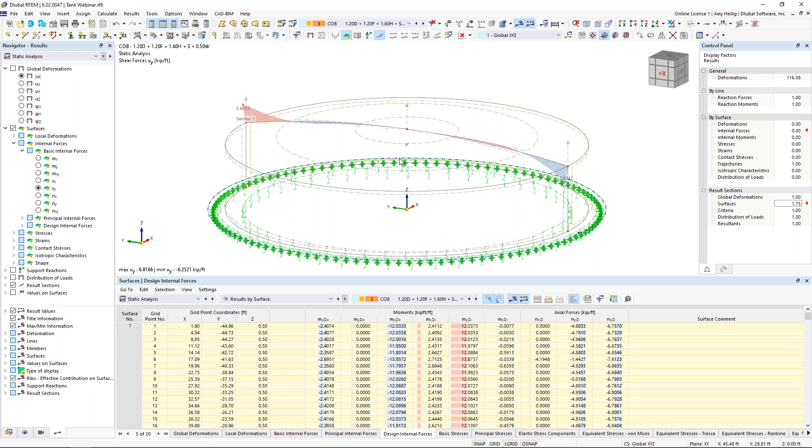For any of these results sections, we can right-click and take a look at the results diagram. This allows me to turn on internal forces and view in more detail what's going on along the entire length of those surfaces. I can change to different load combinations in my drop-down and add this information to my printout report. So quite a few options here to see these values in more detail than what we can see graphically or in table format.

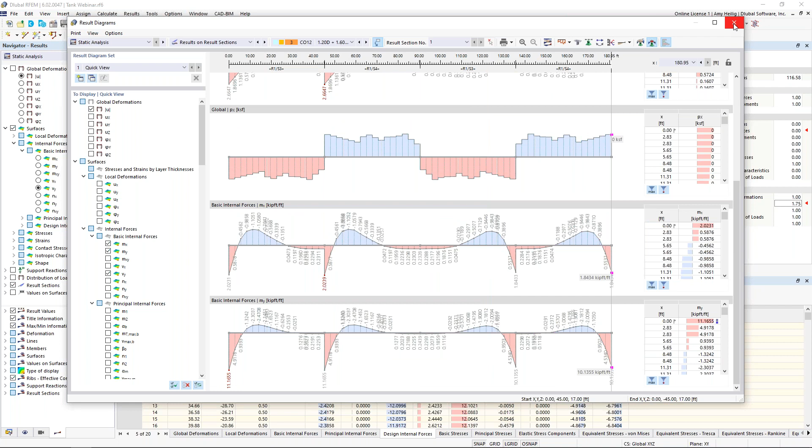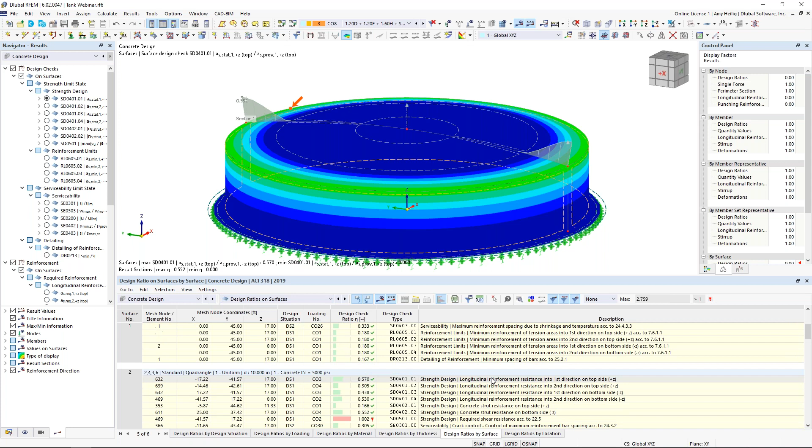That sums up a brief introduction to the static analysis, but we also ran the design utilizing the concrete design add-on. Within my drop-down box in the navigator, I can choose concrete design, and notice that our table format also gives us a drop-down where I can view the design ratios on the surface. Everything is in table format for each one of the code checks from the ACI for each surface.

Now we have a few red numbers here, flagging that we're over that design ratio of 1.0. If we take a look at some of these checks, it's no surprise that it's crack control. If you remember, we had set our limiting crack width to 0.004 inches, so it looks like we're exceeding that. We'd want to take a look to see if there's something else we can do to decrease that design ratio, or maybe it's not of concern at all.

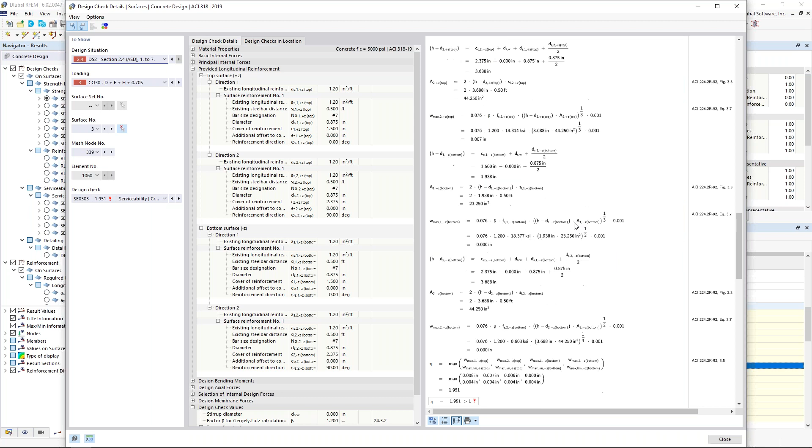While investigating these design ratios, we can access for any one of them what we call the design check details. This is new within RFEM 6 and something I think is incredibly powerful, in the sense that we now give you all of the formulas, the variables, and the code references used to come up with this design ratio shown here at the bottom.

We can add these formulas to our printout report, and as we make changes to the structure and rerun the calculation, these formulas will automatically update in the printout report as well. This may help us do some troubleshooting for some of these high design ratios. We're trying to avoid this black box software to give you as much information as possible to understand where all of these design checks are coming from.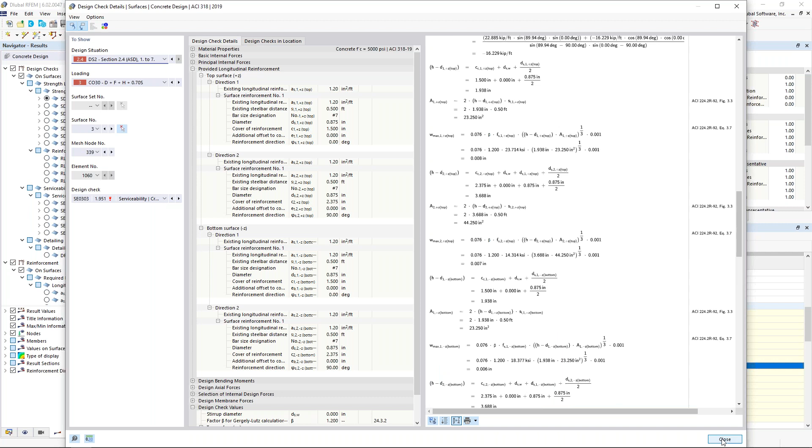That sums up our example today with our concrete analysis and design. What I'd like to do now is jump to an additional model to go over a new add-on we have added within RFEM 6 called the geotechnical analysis.

In this existing model, I will visit my base data, and under add-ons, I've activated this add-on called geotechnical analysis. This is to account for the true soil structure interaction. We're nearing the end of our presentation today, so I can't go over all of the input information, but we have a couple of recorded webinars devoted entirely to this particular add-on that you can refer to on our website and YouTube channel if you're interested in learning more.

The geotechnical analysis can be coupled with the concrete design add-on or any of these additional add-ons shown here. Once activated, the program will give us a couple additional options in our navigator. I should also say this center structure here is the tank that we just worked through with our first example, so more or less this is the same structure here.

I've also modeled a couple adjacent structures with standard concrete materials. I'm interested not only in the soil structure interaction for my structure alone, but also how these adjacent structures will affect maybe settlement for my structure. Perhaps they're very close or whatever else may be going on, and we want to get a full picture of what's happening with the soil settlement.

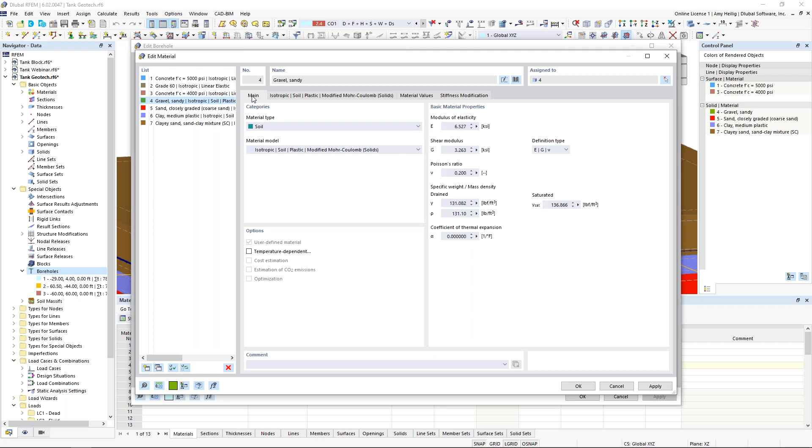Once we have all the materials defined for our soil samples, we create this first borehole. We define the layer number with the relevant material and then the thickness, or more or less the depth of that soil. You can see I have 4 materials defined here based on varying depths, 15 feet, 6 feet, and so on.

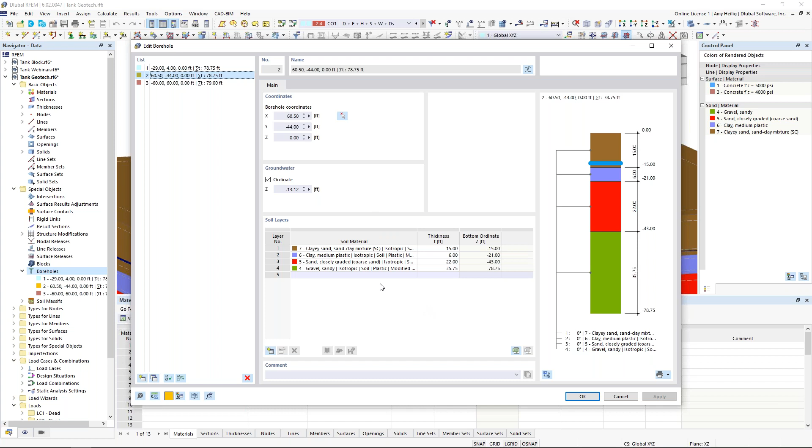I can create multiple borehole definitions. These might all vary in thickness or possibly even material, depending on how far away they are. I've defined 3 boreholes for this particular example. If I turn this to wireframe view, we can see the boreholes actually shown graphically within the model at the locations I was given from the geotech.

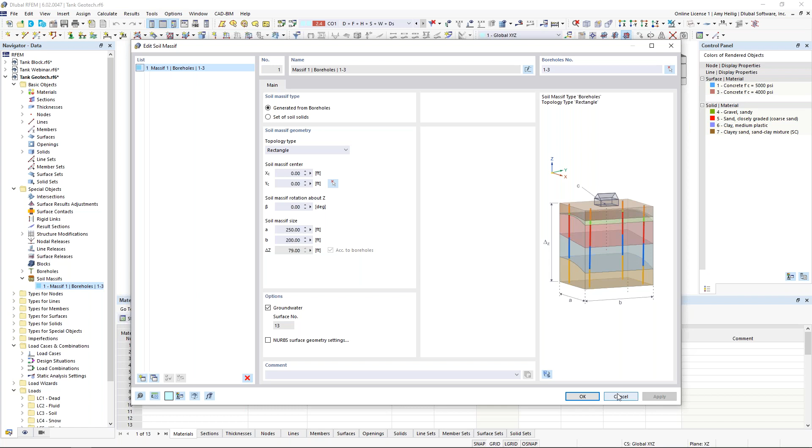After creating our boreholes, we also have the option to create the soil massif. If I take a look at the existing soil massif, we would want to reference the 3 boreholes, then give it a size. I created this one at 250 feet by 200 feet. The program will tie together all of these borehole or soil sample definitions and create 3D solids to represent my soil within the model with the true stiffness properties of the soil directly.

That's what we're seeing here when we go to a rendered view. Each one of these is a solid element, which we would essentially mesh according to finite element analysis.

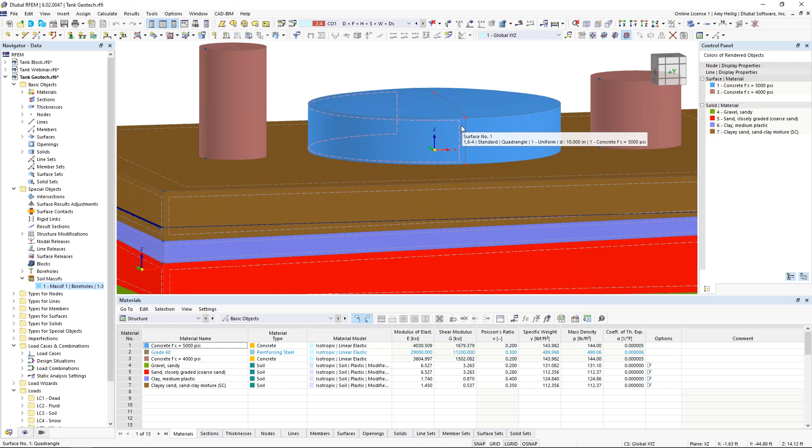The other important thing is that the previous support definitions I created in the first example are gone — I deleted them altogether. We don't need support conditions anymore because this structure is essentially modeled directly on top of the soil itself. For true soil structure interaction, that surface support and line support were completely deleted.

So what we want to also do in our load cases is define a new load case here, called the self-weight of soil, with the action category set to dead load for the soil. The soil will have its own self-weight that we've activated here.

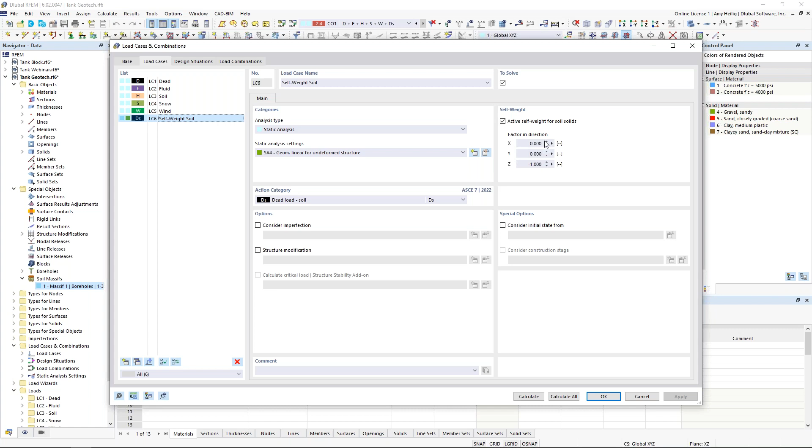For this simple example, I only created one load combination. You can see from the previous example I still have all those same loads applied to the structure — dead, fluid, soil, and so on — but I've also taken into consideration the self-weight of the soil. This single load combination is unfactored, since perhaps I'm only interested in the settlement or serviceability design of my structure. It's still part of a single design situation here.

Once we've input that additional load case and created that load combination, we can actually run the calculation. I've already saved the results here just because it does take a couple of minutes to run.

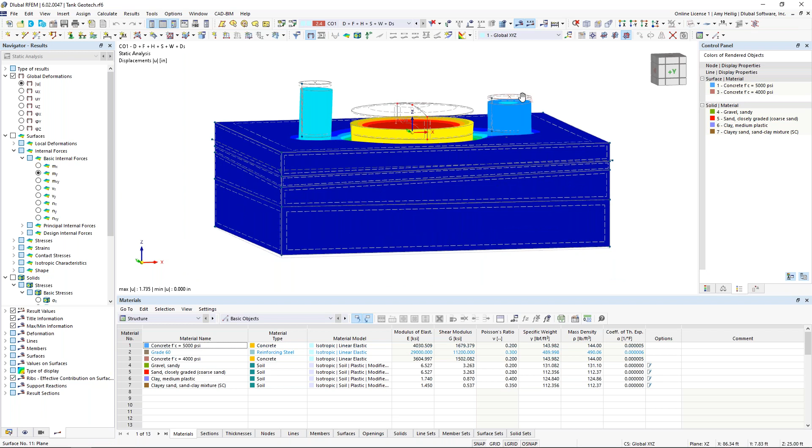When we take a look at the static analysis results, and in particular the global deformation, we can see the deformation of our structure. If we reduce the factor here, it's not quite as bad as it seems. We can see that the max deformation is actually at the base of the structure.

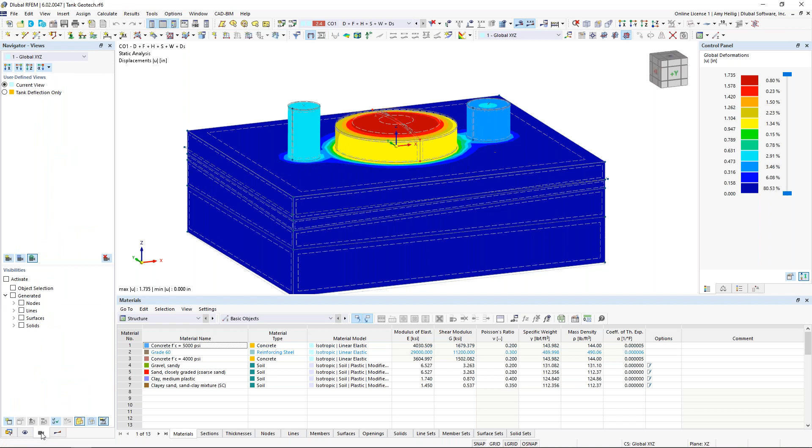I'm really more interested to see what's going on at the foundation level. I created an already defined view here for my tank deflection, so my tank is still existing here — I just went ahead and hid it in the background.

So now I can view the deflection of the tank element based on that soil structure interaction, but also we can see the deflection of those adjacent structures and maybe how the structures are influencing that as they're modeled very close together. So if I'm also interested to view this deflection in the depth of these solids, we can see it's really not so easy as we show it now.

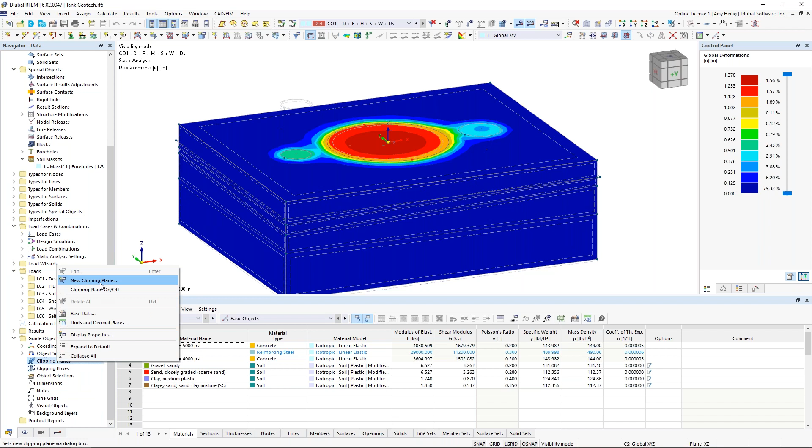That's why in the program, if we visit our navigator on the left-hand side and scroll all the way down to the bottom, we have these guide objects, and in particular a clipping plane. I can right-click to create a new clipping plane, and the definition type will be offset from the global XYZ axes. I'm going to set this to the XZ coordinates here.

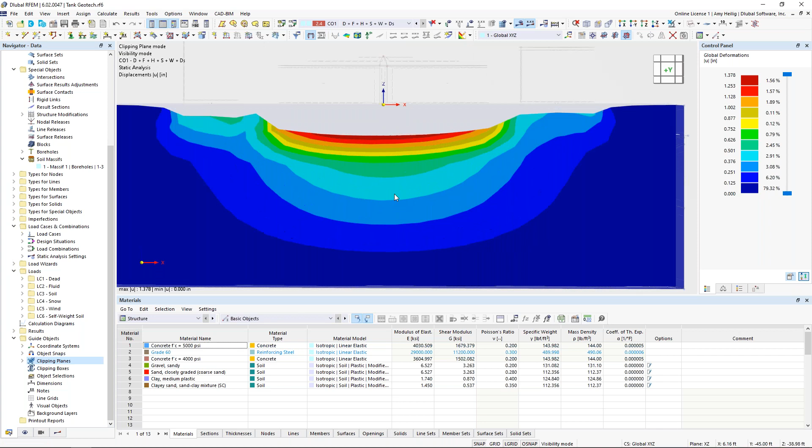When I click OK and set active, you can see that we're essentially slicing right through those solid elements of our soil, so we can view the deflection in more detail in the interior of the true soil elements. We can also take this clipping plane and drag it back and forth to see what's going on along the length.

I'll go ahead and decrease this deformation factor so it's a little easier to see. If we hold down our control key and slide this clipping plane, it will actually move it every 1 foot increment as well.

Now, we also might be interested, in addition to the deflection here, in the soil stresses directly. So under my navigator, I can access not my surfaces, but this time solids, where we have these 3D solid elements and I can view the stresses based on the local z-axes.

We can take a look again, utilizing this clipping plane, at what's going on in the interior of these 3D solid elements, and how these soil stresses are influenced by the adjacent structures. Again, we can rotate this around and drag this clipping plane to see what's going on along the entire length of the structure.

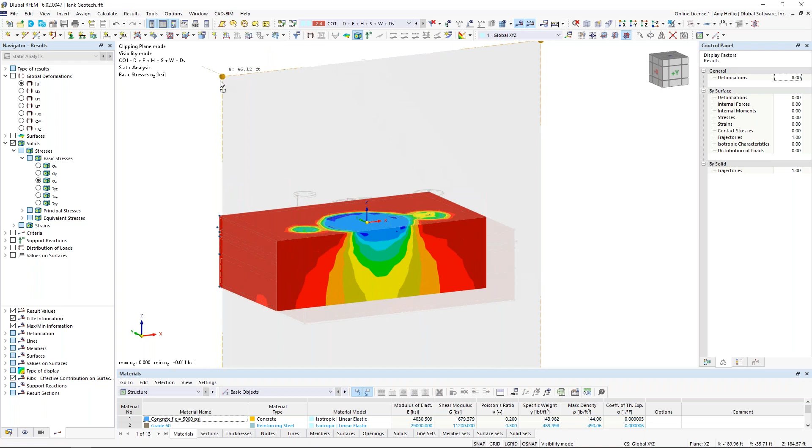So again, just a brief introduction to this geotechnical analysis and that true soil structure interaction. Something to consider, again, is that not just concrete structures, but all other structure types we offer can be integrated with this additional add-on.